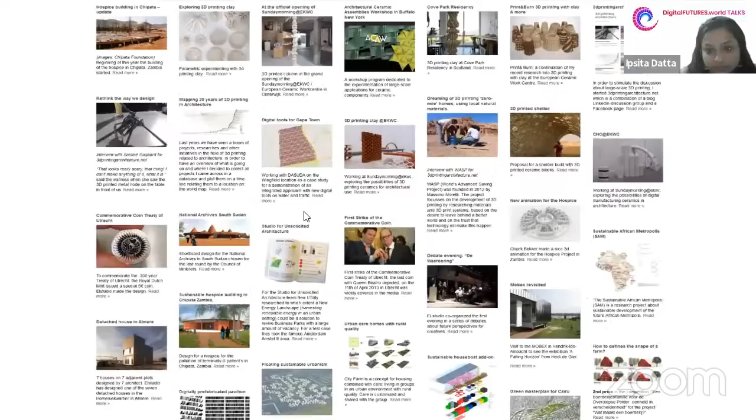So let's start with myself first. You already introduced me. I will talk a little bit about it to give a bit of context to the research I'm going to show, because I had my own office for quite a while, where I did a great variety of works, from small designs to big landscapes. And one of them was 3D printing ceramics, which we'll come back to.

But at the moment, I'm working at a robot lab in Amsterdam. It's a robotic fabrication education facility where we try to combine practice, research, and education, which is super interesting. However, we're not working at the moment with ceramics. We're working mainly with wood and 3D printing with plastics. So the work I'm showing here will be a little bit older, but hopefully we will get back to working in ceramics pretty soon.

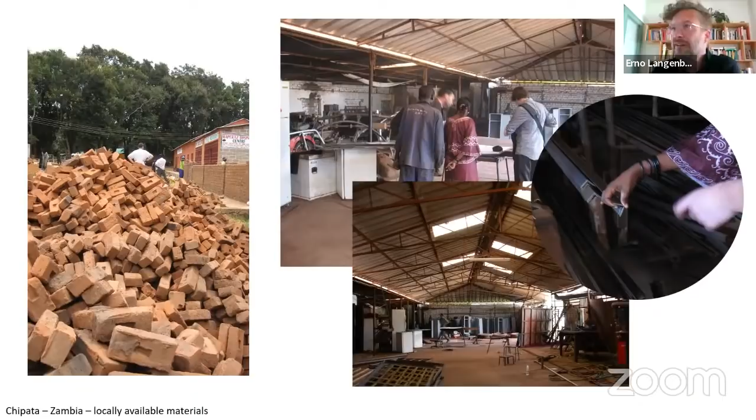It all kind of started when I was with some friends working on a project in Zambia. It was a sustainable hospice building, and the idea was to make it from local source material. We visited the location and figured out that there was, of course, not that much material available. And for the roof, we were depending on a limited amount of steel, which was locally fabricated, which was only a 40 by 40 L profile.

So what was quite interesting, we worked with an engineering company who reverse engineered, with this only available steel material, a kind of complicated roof, which was fairly easy to mount, just from the locally available material. And in this sense, parametric design helped quite a lot. So the software was complicated, but the material was very simple.

The project is still being built. It's a kind of slow process, but being on the site, I thought, yeah, there's so much other material as well which is not used. So that's where my interest started in 3D printing with local material like clay or earth. This combined my interest in digital programming and fabrication and the material of the earth, with the idea to make a very sustainable way of building.

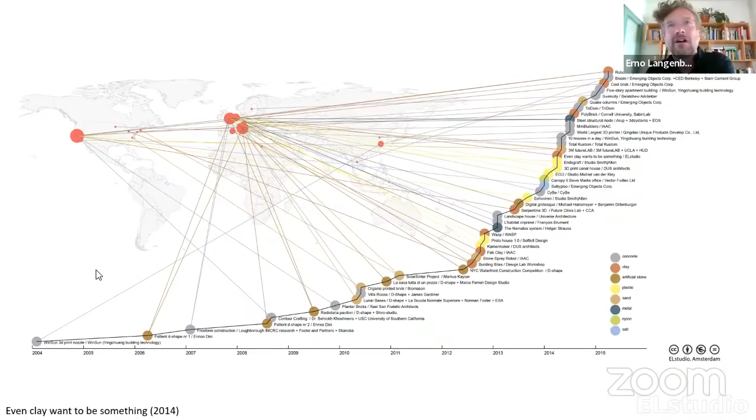So I started my research in 3D printing, first making this little graph, finding out that there was already a lot of things done. But my main interest was to have local material in order to avoid this global movement of materials all over the place, which now is actually more urgent than ever because of the global situation. And of course, with the idea to go to a more circular building practice where knowledge goes through the world, but not the material.

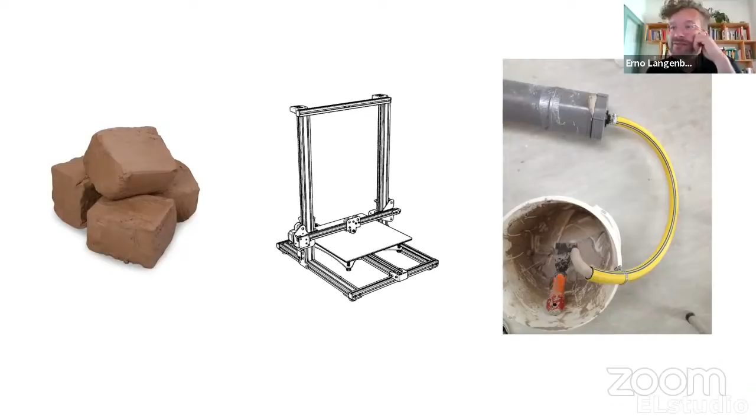So my choice of material was clay. The research started out: what can we do with clay, which is local, available more or less around the world, and also applied in architecture quite often, like roof tiles, bricks, and all these kinds of elements. So what could digital fabrication add to this process, which is basically the extrusion of clay paste, if you put it simply, which led me back to the old way of making pots, which is coiling. It's quite known in pottery, and normally this is done by hand, and the clay is often smoothened by hand in order to make the print a bit stronger.

However, for architectural application this was a bit limited, because you're stuck to a kind of vessel shape. And I wanted to explore the possibilities of opening up this structure in order to let, for example, air in or liquid or light through. So my initial thought was to have two ways: you could either make holes or rotate the print. The research entails, I think, which is important, experiments in these three fields, and ideally they come together in the middle.

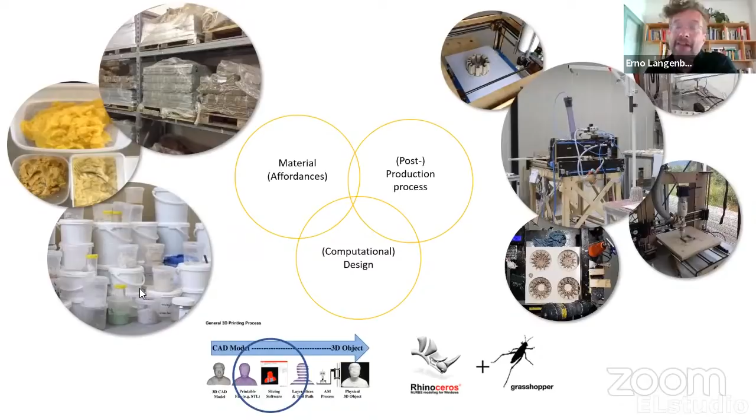So I set out for a few years of experimentation with all different materials. We hacked various different kinds of 3D printers, CNC routers, and the sort, and of course looked into the software, which at that time was not so much available. By now there are some more booklets and tutorials on how to print clay, which makes life much easier. Still, I think it's quite a big step for students to step into this.

So the first experiments were these objects, which was basically turning the print around and defining the printing path yourself. And by overlapping the clay, because it's a smooth material, you can make lattice-like structures. And actually the crossing of paths is quite a good thing to do, because it makes the clay only stronger.

From this, the next project stems, which is already a bit more of an architectural application, where these bricks could be stacked without using glue. In this way, you could envision a small pavilion being made, where the bricks are adjusted to local needs, like ventilation or air or sunlight, if you will, by just changing the script. All of these bricks are identical in terms of code.

Well, this was a kind of visualization, and eventually, if you had the time, this could be a pavilion you could make with this technique. We'll come back to this time issue at the end. So the next attempt I did was to open up the vessels, if you will, in another direction.

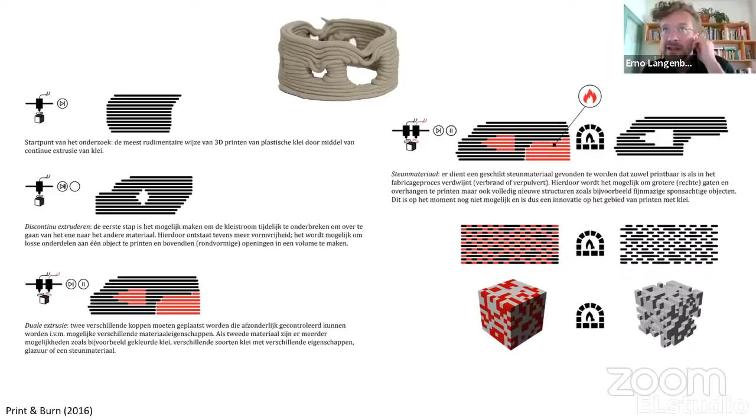And it could be an ideal solution, because clay has to be fired in a kiln, and at that temperature, everything else but the clay will disappear for sure. So if you are able to print with two different materials, the second material will disappear or disintegrate. I was having the luxury to try this out at the European Ceramic Workcentre in the south of Holland, which is a great workplace with different kinds of kilns where you can try this out.

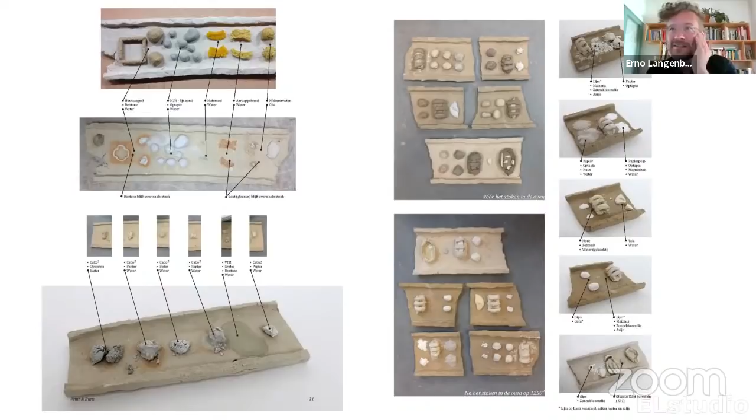So we tried all different inorganic and organic materials. Some are more successful than others. Some organic materials which you think will disappear turn out to be glazings and so on. It's quite fascinating. But it requires a lot of attention and a lot of further research. We managed a few materials which were workable, like the one on the left is a kind of mixture between bentonite and other kinds of ingredients, which turned into powder, which was a kind of successful start of it all.

A next residency I did was in Scotland at Cove Park. It's an amazing place next to the sea, where you have your own studio. I installed my two printers and started experimenting a bit further on different ways of opening up the structures. And one of them was also a bit more the rotated print, where I incorporated the locally found beach glass, which melts at the same temperature as the ceramic, so you could integrate it quite well.

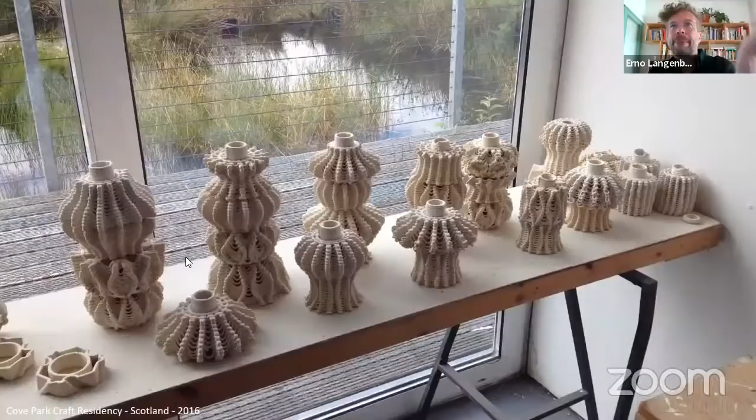The previous was a quite simple trajectory for the printing, but this is a more complicated one, which combines alternating layers in different directions with the idea to open up the structure. And as a result, of course, we cannot ignore gravity, so the clay will drop down because it's very bad at bridging. But luckily, it's going down in a controlled manner. So you could tell in advance how far it would go down. So in that way, you can play with the bad qualities of the clay in such a way that it becomes interesting for you.

I printed a lot of these objects, and eventually, all being the same, they could be stacked into this kind of ornamental column, which has a kind of organic feel to it, although it's a completely scripted object, and it's all just basically ones and zeros. I think it's a quite fascinating idea.

Another experiment was a bit more free and constrained at the same time. It's printing on a mold, which is also a technique used in ceramics. And it gives the freedom of printing in real 3 dimensions, while at the same time being free at the depositing of the clay itself. And you can imagine that you can have very intricate patterns and crazy shapes, but still following the same curve, which I think could be quite useful for architectural applications. These might be too small, but I think if you scale it up, it could be interesting.

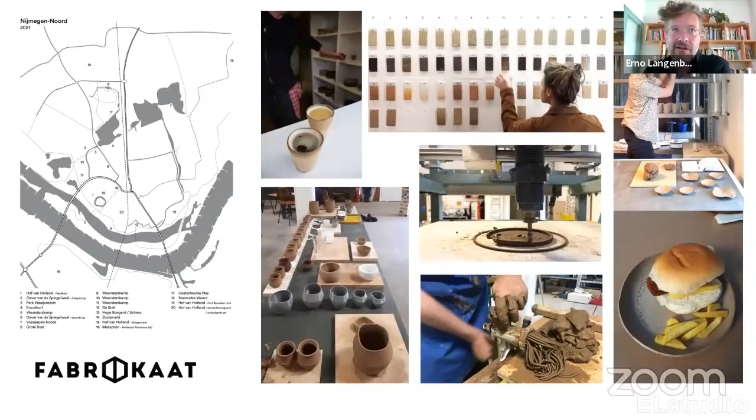The last project I'm showing here is a non-finished project, but it's more recent, and it's a beginning of something more architectural. It's a commission I had for the foundation Fabrikaat. They're in the middle of Holland, based next to a river, and they asked artists and designers to work with the local clay they found next to their location. And a lot of different projects are being done. And they asked me to come up with a little facade cladding for the building they have here on the top. And it was an ornamental facade tiling.

We started out thinking about the maximum size of tiles which we could make, because the idea was to have it all locally produced. So we would bring in small printers, and they had a small kiln, which was basically the bottleneck of the whole process, because the kiln size was limited. So we couldn't make the tiles too big. When you lay them out on this building, which was an old building and not straight at all, you of course have a lot of corrections at the edges.

So that's, I thought, the idea: if you're gonna have a lot of different ones and the printer doesn't mind, you might as well have them all different. So therefore I made a design with all completely different tiles, kind of representing the flow of the river, and this could be interesting to be done.

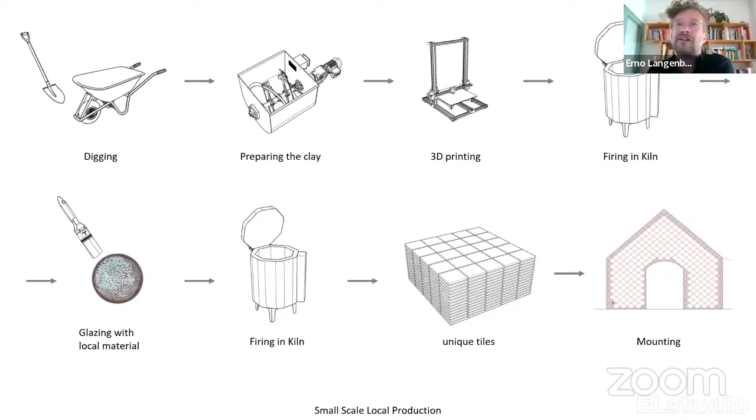So we all were happy, and we started thinking about how to make this. And of course, there's a lot more to it than just printing these tiles. We had to dig, prepare the clay, printing and firing the kiln, glazing and firing again. And then, of course, in the end, mounting the tiles. And adding dates to it, we came to the conclusion that it's quite a lengthy process, especially the printing would

take very long. And eventually there was this idea to make a little print farm, and we could reduce the printing time enough so it would be a feasible project within the time frame we had, the location, all by local means. And so we didn't have to travel around with the clay or the prints. So it was ideal. But it made me think about how to scale this up, because this is in fact only a small facade. It's really not that big of a project.

Oh yeah, well, small note is that the project will be finished, but in a different building. But I will continue.

Because if you think about a house, which requires around 8,000 bricks, could you do this in a sensible manner in the way we made this little local project? And I think it becomes a bit more difficult because of the amount of time and the amount of hours, and still these printers don't run unattended. So most likely, this would be more feasible in a kind of factory-like setting like this big brick factory, where there's already robots available. So it could be interesting.

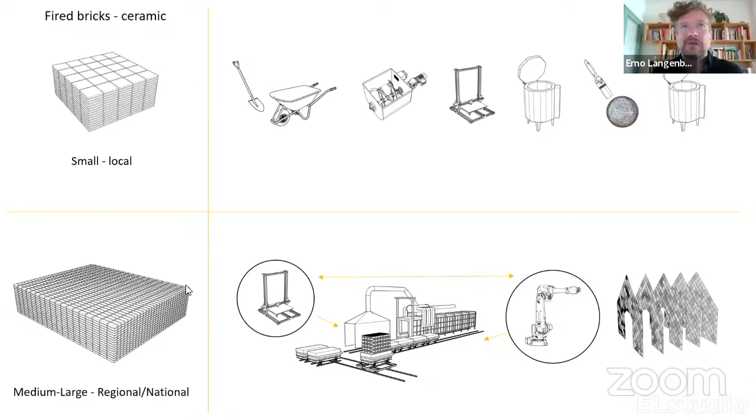So my question was also, where does the added value of 3D printing in ceramics, which is different than the later project, which is 3D printing with unburnt clay, where could this be? Is it in a factory? Is it really local? And how big would it be to make sense at all on an architectural scale? Because in the end, we talk a bit more about a product-like object.

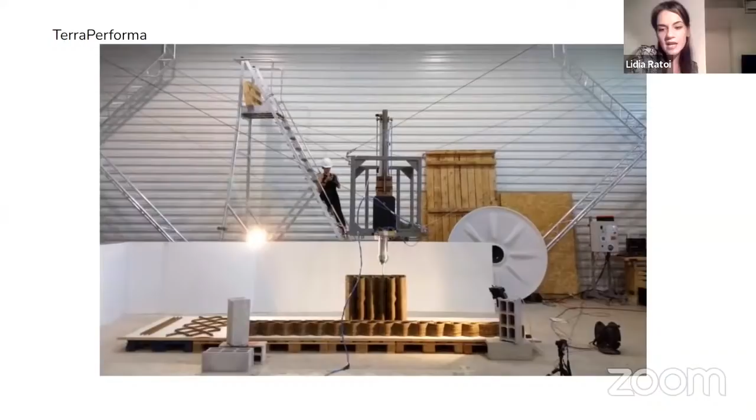adapt to local conditions. And the impact I'm trying to measure is how technology is changing, how are we influencing the communities for which we design, and how is nature growing and thriving instead of adapting to what we're doing to it. So as an introduction, I'd like to very briefly present my first project dealing with the issue of robotic fabrication, TerraPerforma, done with IAAC, Barcelona.

My thesis advisors were Alex and Edouard Cabay. And I really want to thank them for giving me a very healthy introduction to the world of robotic fabrication. And I use the word healthy because a lot of times we teach students how to use tools, but not how to question the ethics, the implications, or the potential of these tools.

So I think I was super lucky, because the brief for this project consisted in constructing a 3D printed clay house with a self-regulating environment. So we were taught how to question and how to quantify our designs. So as opposed to what I would have imagined about robotics, because that was my very first experience with robot fabrication, there was a lot of research on historical background, taking inspiration from vernacular architecture, such as the wind catchers of Iran and the clay towers of Yemen, which allow for self-cooling on the inside of the building.

And each brick had its own unique logic regarding solar radiation and wind patterns, but the overall facade worked cohesively. And all aspects of the design were calibrated for the site in Valldaura. And I think around this time, I really started to question the projects that I was seeing done worldwide, and most importantly, these kind of trends in computational design.

And one trend that I really took a stand against was that of mass customization, which implies that the same machine, the same digital file can create an entire catalog of unique elements, though they're all distinguishable from the same mother entity. And I took the liberty to go against this trend because I consider it doesn't really respect the intelligence of a robotic arm.

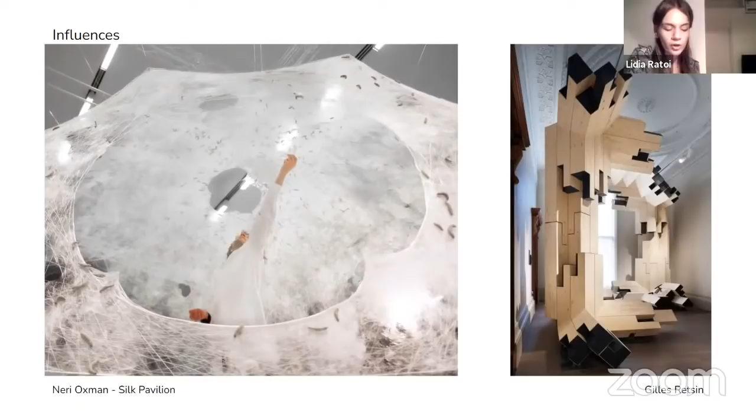So other influences that I started to look into were, of course, from designers such as Neri Oxman, who's doing cutting edge research in biomaterials and robotic fabrication and soft robotics, and Gilles Retsin, the pioneer of discrete architecture. And I remember at the time I was actually preparing to interview him for Cloth magazine. And so I got to spend a lot of time researching his work, reading about it. And I got really interested in the world of object-oriented programming and object-oriented ontology.

And I think possibly the most inspiring element was Mark Foster Gage's arrow diagram. So it protests the treatment of architecture simply as a diagrammatic means that needs to be simplified until the point at which it can be built the easiest. And this has been a big influence on my work because when working with biomaterials, the behavior of the material can be revealed through an extensive trial and error procedure paired with machining protocol. But you can only really discover answers, because the methodology is quite new, so you cannot be given answers.

And this brings us to restorative coral habitats. This is the project that I was really lucky to be a part of in Hong Kong University, my first project when I joined Hong Kong. They actually started the project a little bit before my arrival, but I arrived exactly at the fun part, the design and the testing phase. And it's a project in which all 50 units are identical for extremely specific requirements.

So the project was a collaboration between the architecture department in Hong Kong University and the marine biology department in Hong Kong University. So it brought together very different sets of expertise. And it was tailored for the unique conditions of Hong Kong. So Hong Kong is a city with an extraordinary richness of nature, but it's also one of the most dense built environments in the world and has really high pollution levels.

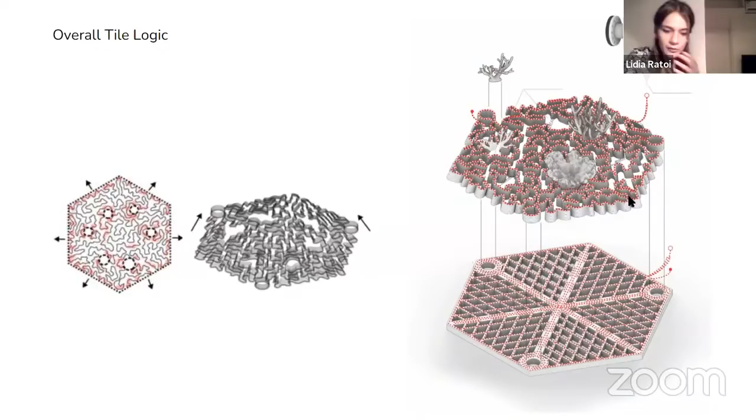So there was a lot of calibration we had to do, because there were the requests from the marine biology side, then there was material behavior, and there was machine behavior. So we started first by testing the bottom layers. The first test was a square grid, but the problem was that basically the nozzle dragged too much material within the intersections.

Then we tried with a triangular grid, but the printing lines were too long. It was cracking when it was drying. Then we tried a trihexagonal grid, but it was also cracking when it was drying. So then we experimented with a space filling curve, but the tiles became too dense and there was too much material use. Printing time was too long.

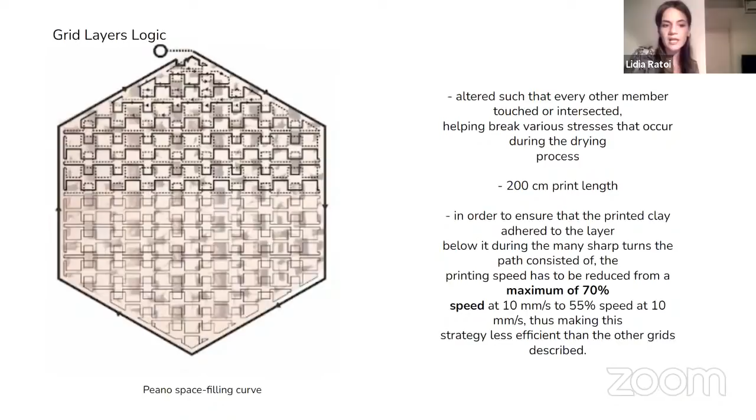I forgot to mention we were quite a small team printing, and we also couldn't postpone the very precise deadline that we had because, as I said, corals only grow in the warm season. So we only had a margin of error of a few weeks within the year in which we could deploy the tiles. So finally, we created the diagrids and we divided the hexagon into separate parts.

And that gave us, first of all, shorter printing lines. And the tiles were symmetrical around the center. So that means that they were drying symmetrically and we didn't have cracking anymore.

And the other problem that we had to account for was, as I said, the competing species. Algae is the biggest problem. They grow the fastest as opposed to corals, which are one of the species that grow the slowest. So we had to design these coral mimicry layers really like a shield to protect the coral fragments.

So we started with a space filling curve, but it was irregular. So that created problems when it was drying, it was cracking. Sharp edges also are not good because they would interfere with coral growth patterns. So you really had to accommodate for how the corals naturally grow. So then we tried a shortest path logic, but again, there were long lines uninterrupted. So they were cracking when they were drying.

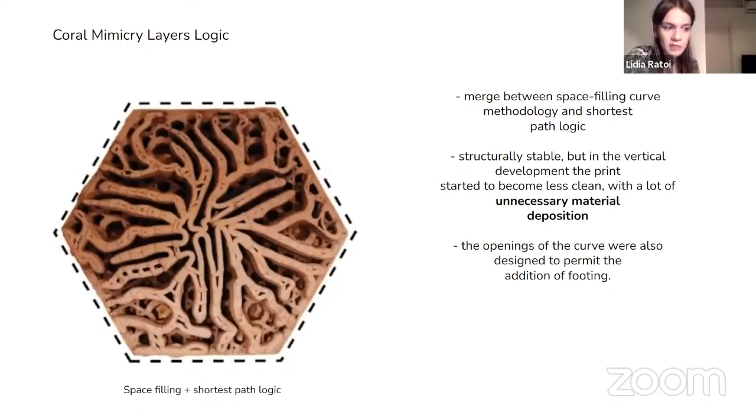Then we decided on a mix between a space filling curve logic and a shortest path. And it was drying okay, but it was using too much material. It was taking too long to print. It was taking too long to dry.

So finally, we experimented with the Gosper fractal curve, and that was actually growing from the layers underneath because we were printing first the grid layers, and then on top of it, we were printing the coral mimicry layers. So they had to dry cohesively together. And each fractal subdivision was coinciding with the sides or the diagonal of the layer underneath. And then the subdivision was relaxed because we couldn't have sharp edges.

And being that we had a curve that started to work with the layers underneath, the last step we did was that we subdivided the curve even more to have shorter printing lines to dry better. And we added the pockets for corals because all coral fragments had about 6 to 8 cm that they needed as little pockets to be deposited in.

And this was a challenge because once again, when we created bigger openings, we would have incohesive drying. So we made this folding pattern. So whenever there's a pocket, the line right next to it gets more dense to counterbalance the scarcity.

So we also included these special handles in the patterns, which would signal the location of the legs because we couldn't just put the tiles on the bottom of the water. We had to print legs for them as well and elevate them slightly because there's sediment on the bottom of the water and the ground is uneven. And all ridges and trenches were at least 2.5 cm wide so that the corals can grow within them.

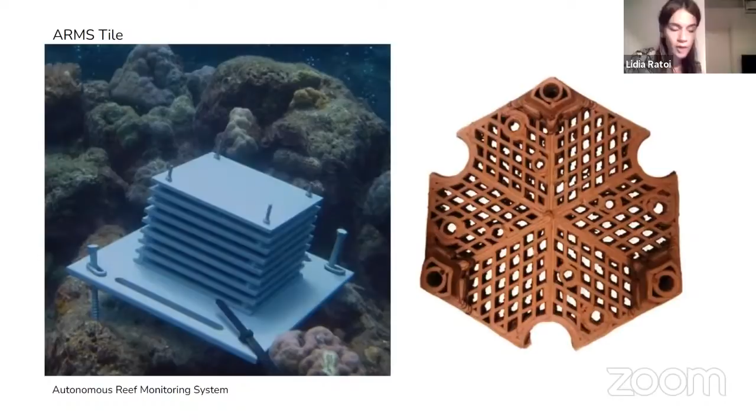And between every 3 tiles, there's this special tile that hosts the autonomous reef monitoring system. It's a standardized global measuring tool for underwater life behavior. And this brings me to discuss the overall system and kind of concludes.

As I mentioned, we had to print legs for the tiles as well. The way that we did that is that we would print the grid layers, then we would print the coral layers. We would wait for them to dry for about 4 days, and then we would flip them and print the legs. And then we created assemblies with 3 tiles holding the coral fragments and 1 tile holding the ARMS. And there's no formal variation, there's no mass customization because we need to be able to trace the results.

If results between tiles would be different, we wouldn't know if it's because of the geometry or because of the environment. So in all 3 sites, all tile units are completely identical. As I mentioned, we had a team of diving volunteers to deploy the tiles. And from the observations so far, both flora and fauna are accepting and are benefiting from the tiles. And there's also species we didn't expect interacting with them. The coral fragments are growing, as you can see.

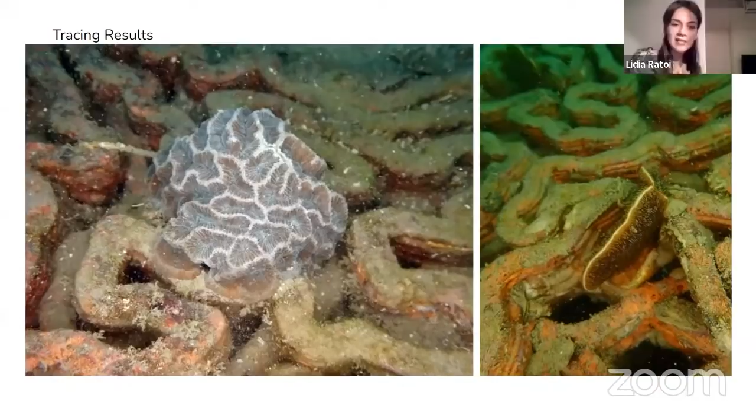And yeah, this is about it, about this project. And I'd like to very briefly introduce another one. If so far I discussed pure research, I really want to talk about how teaching has influenced my research. So I started teaching the year 2 program in Hong Kong University about 3 years ago. And the program focused on housing with studies on vernacular Chinese architecture in the second semester. And I was teaching a studio on traditional Chinese wooden houses, and I became really, really interested in the topic.

And then this led me to collaborate with John Lin, who's the previous coordinator of the program, on the Traditional House of the Future project. So I'll present it briefly because it's at the beginning stage, and we haven't really been able to print so far because of the quite bad situation with COVID in Hong Kong. So I haven't really been able to be in the lab. The project is located in Guizhou, mainland China, in the village of Nanlong. So that's south central China.

And the aim of the project is to create a new urban attraction that could generate touristic potential and benefit the village financially. And we're going to dismantle the existing wooden structure, restore it and reassemble it, and intervene with a new robotically printed wall. So that project actually deals with a very, very classical architecture issue, the way that we imagine it, with that of the skeleton and the skin. And I started questioning this issue as a design generator in the spring of 2021, with students intervening with a new wall language in traditional Northern Chinese houses. And the methodology followed through the next year.

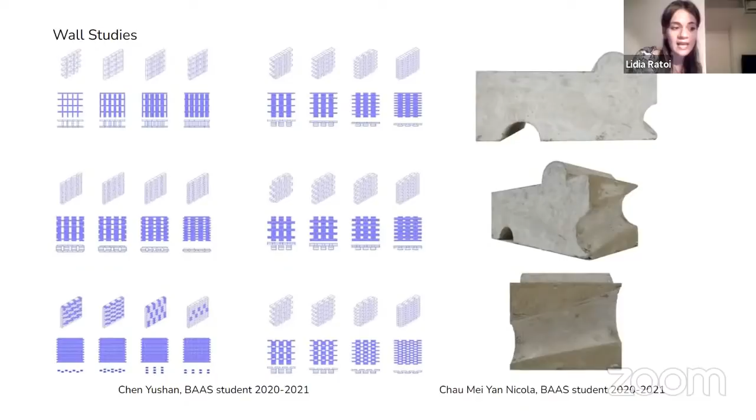I had the opportunity to become the coordinator of year 2, and the studio was a great opportunity to pair teaching and research. And we did a workshop where we built a version of a wooden brick house prototype at 1:3 scale. And we imagined a new type of bricks that were porous and they were reacting with light. And it also allowed students to use reference from my previous work with TerraPerforma. So they were creating novel bricks and stacking languages. For example, in the project on the right, the student investigated how inclined channels can allow winter sun to penetrate the inside of the house, but deflect summer sun rays. And that's a technique used in traditional Northern Indian temples.

The geometry of the wall extends beyond the house. It creates enclosed courtyards, which is a very common feature in traditional Chinese houses. And it has a semi-private entry. And the two structures communicate, yet they're very clearly defined. These are some studies that we're doing about the tectonic relationship on the insides. And I'd like to highlight here this issue of non-exploitative architecture. And this includes exploitation of people and excluding them from the process. And this is something that we really don't want.

So therefore, our construction process relies almost entirely on local builders and local villagers, and it creates a participatory process of construction with the village. So local woodworkers will help us in developing new ways of erecting the wooden structures, because it's not possible to build the wooden frames separately as usual and then put them up, because they will be mounted after we 3D print the walls. And villagers will also participate with us in sourcing and mixing of clay for 3D printing. And a lot of families have already left the village.

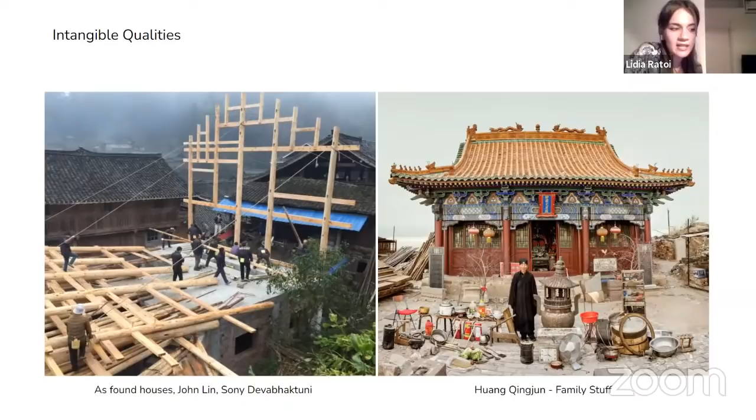It's kind of an abandoned village. So the traces of their own domesticity have remained behind, and they will be repurposed for the traditional houses of the future. And on this note, I just want to quickly introduce my latest research project, Impossible Bricks. It aims to investigate how food waste can be paired with robotic fabrication, because food waste is the largest source of waste in Hong Kong.

And I'm currently working together with two colleagues, Hao Tian Zhang and Tianning Li, on a prototype in Cheung Chau Island in Hong Kong, and we'll use oyster shells structurally, and that's inspired by actually 600 years of tradition of using oyster walls in Cantonese architecture. And we already did some tests this winter combining bioplastics, digital fabrication and scanning techniques.

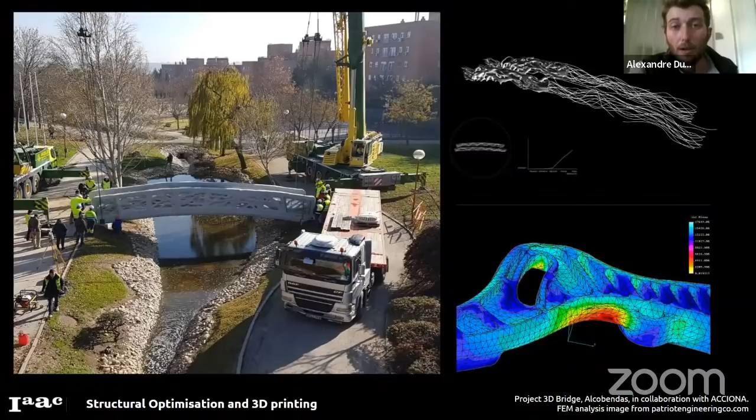What is all this technology doing? We have the chance to be in a boom where digital technology is entering construction. For example, this project where we were capable of 3D printing a bridge, one of the first ones, in Madrid, that was in this case made of concrete together with Acciona, D-Shape, and UPC, where we had certainly a huge design freedom. We have possibilities of using robots to make new processes, new materials, but also big liberty in terms of

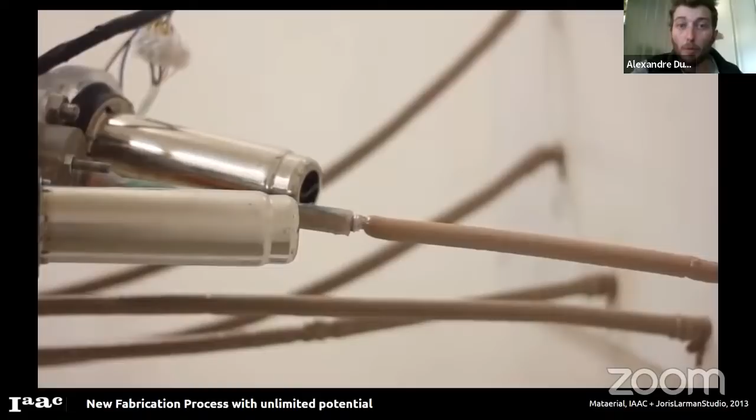design. This wonderful project, now close to 10 years old, was showing how we could maybe print totally in mid-air and make these crazy geometries, if we push the limit of what we can do with materials, how we can control the robot, and how we can integrate all this technology. This said, we had a question for the technology. When you think about it, we have loved this quote from Cedric Price: technology is the answer, but what was the question? And it happens that we have plenty of questions to resolve and to tackle in our society, and especially in architecture, that this video here will introduce, if it works. See.

I don't know if I shut the sound now. I have it out. Do you hear the sound? Yes, but that's okay.

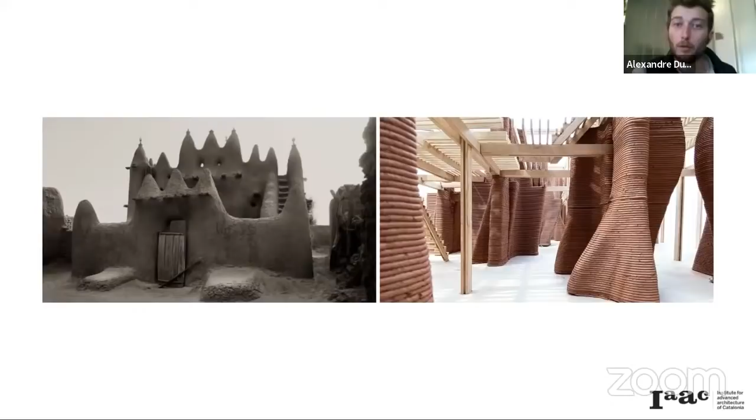a type of architecture. And here with Edouard, we like to show this relation between the past, the history, and how the new tools that we have available as designers could help us to explore this future. When we look, for example, at one of the main topics in Earth architecture, we print mainly against gravity. We have to deal with these problems.

In 3D printing, we always have this problem of overhang, for example. But how can we explore the way to support these structures? And Erno was showing us a very nice research where you could fire these supports. We're trying to see if we could also be inspired by the way arches were built, how we could integrate wood in the way we construct new geometries, something that we could place just temporarily and find ways to then remove it and release geometries that were specifically designed to collaborate with the wood.

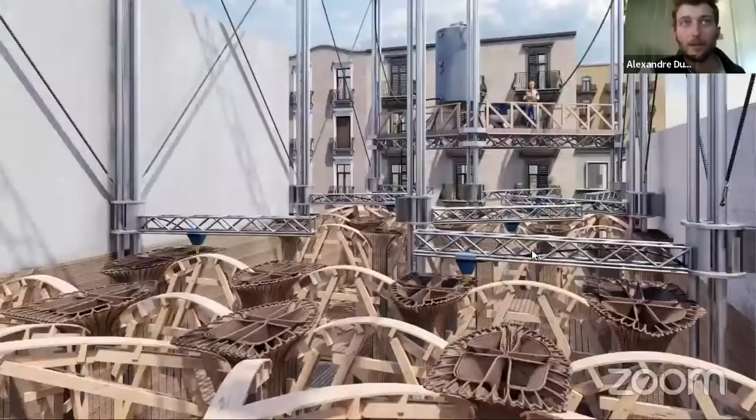So here, many inspirations, as you can see, from the way it was structured and how we could integrate with the specificity of the clay. This is something we feel will be crucial when we look at a different type of architecture that we'll be able to build in more dense cities, and how we could push the boundaries of Earth 3D printing, how we could actually design such beautiful space.

Similarly, if we try to not have any support, but work only with the arch itself, and try to understand how we could build unsupported arches over time, we have many learnings we can get from history, exploring how we could reproduce these geometries, but also understand them using computational design to maybe generate them, but also analyze them, trying to use, in this case, our own geometrical tools to understand them, combined with some structural analysis such as Karamba.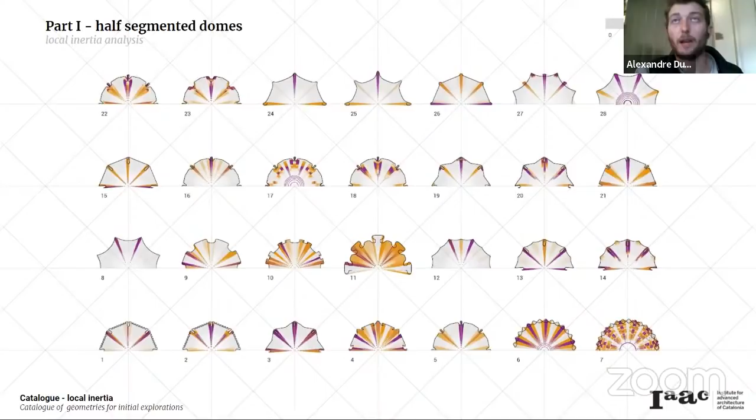We've been exploring a type of methodology that you will see across most of the projects. That is basically a scientific methodology of having a set of catalogs, a set of objects, both in the digital realm and in the physical realm, to let the material express and tell us what geometries are really possible and what could be done in these systems. So you see how they collapse and we learn from it, and then how finally we find out the right geometries, the right balance of gravity and shapes to define these new spaces.

You know, how we can finally have these nerves in the vaults to create such beautiful space as in the Gothic church, for example, in the past. Now, how we can reinterpret these geometries.

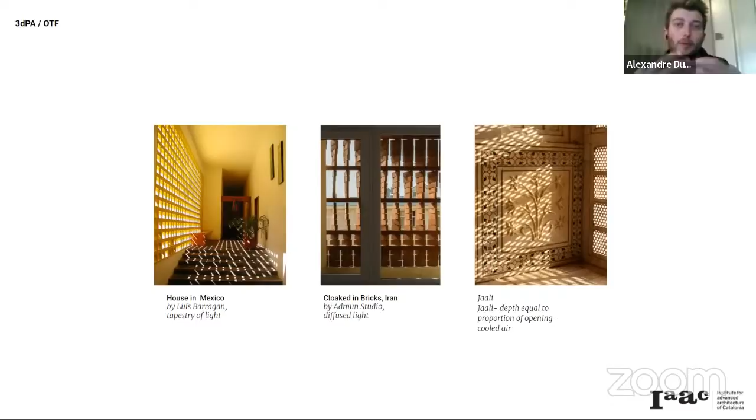Similarly, we've been exploring a lot the question of light. Suddenly, with 3D printing, we have the opportunity to make the Earth building perforated or a bit more evanescent, letting light go through the building, but also allowing a certain level of transparency. Many projects have inspired us, but we also discovered we have many tools available, or let's say scales of operation in which we can act, exploring different ways of building and designing these geometries.

Again, a set of catalogs to understand what are the limits of Earth, what are the limits of these geometries that we could push, using, as you see, sometimes some simple analysis.

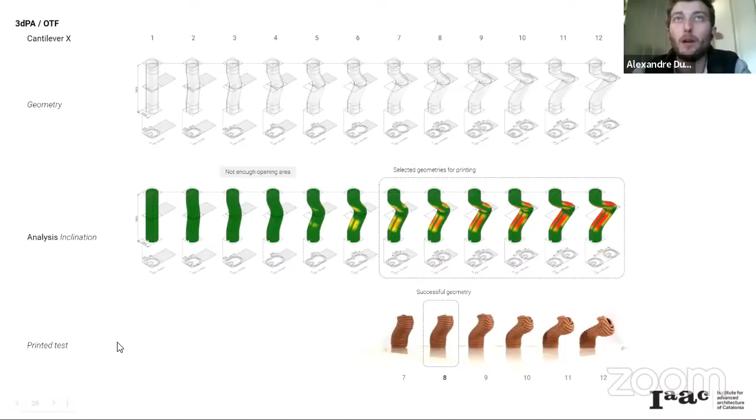For example, in this case, we consider really the inclination, or let's say the cantilever that we can achieve with the building, but also inertia of a small object like this one. And then when you multiply it at a very big scale and understand how we can play with it, you can construct a totally different

systems. What is important here is that you evidently consider the structure, but you also consider the view as a vector, as how we go through the building and how the light can drive these openings, and how we could make that in such a point of view. There's not so much transparency, but from another angle, suddenly a view reveals, letting or choosing, let's say by design, how much light and how much view we could have behind our walls.

This is the kind of thing that then we explore at a larger scale, at the scale of architecture, how we can distribute spaces according to this transparency, how we could be also inspired by the way communities have been building their village according to different levels of privacy. And for example, this student has explored a type of architecture where you would have nucleus a bit more intimate and different public spaces that are a bit more transparent. So how we can really move or translate this learning from the very small scale to the large scale.

Similarly, we've been exploring many different performances. Another one that is very interesting is the question of the wind and the air flowing into the systems. I believe most have tried CFD analysis and different types of tools for these elements, but it's very difficult to physically simulate it in a proper way. And we start to have our own tools that allow us to make quick iterations.

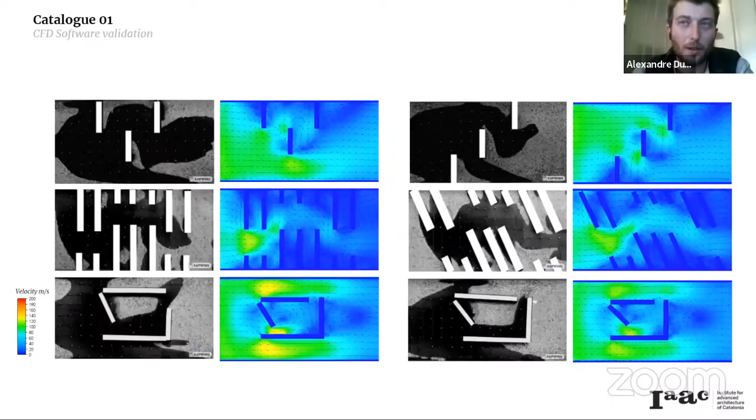Here you can see the technique of the sand spread with pressured air. We also have some other experiments with smoke. Very interesting to learn and to understand how we could play with architectures and the detail of our structures to shape

ventilation in the building. Similarly, we started to look at how we can play with the rain or with the water and how this can move on the surface of our building, either to eject it or remove it far from the building, something that is very important in earth architectures, or try to collect it in certain spaces when we need it more, and therefore concentrate certain areas of our wall that need more reinforcement to the water.

The question of thermal transmittance as well, so how we can design and detail all the parts of the building to handle different, let's say, questions of insulation. So even if we designed, as you've seen in the first video, our walls to be excellently performative in being insulated, something that was not so easy in earth architecture, now we're also looking at how we integrate with the frame, door, windows, what are the different details, and how we can use, again, the performance as a driver for our design.

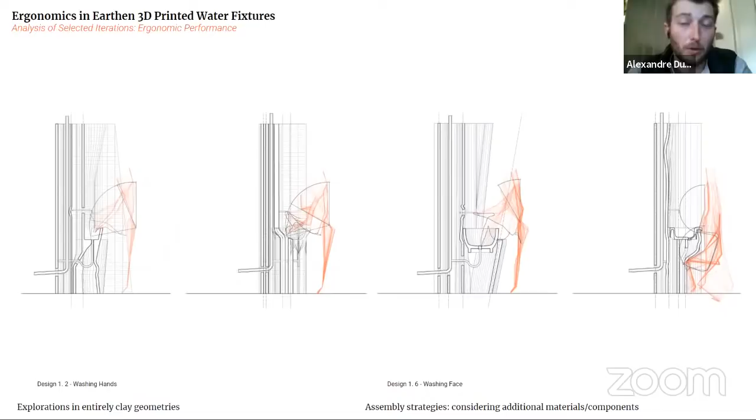We are starting to explore other aspects as well, for example, the ergonomy, how the human body is affecting the way we design a space. For example, here a study on integrating a sink in a wall. So how we design the sink, how we make it repairable or integrated in the system, and working really with the body, so that we can both test simulations, but also scan people with simple technology like Kinect or different elements.

All of these learnings and explorations, we are bringing back into our prototype we built recently in Valldaura, that is a forest campus that we have available 20 minutes from the Barcelona city center, where the students of this year, 3DPA, have built this very nice prototype that integrated some of the learning in the windows, in the fibers, in different details that could be key to realizing this architecture.

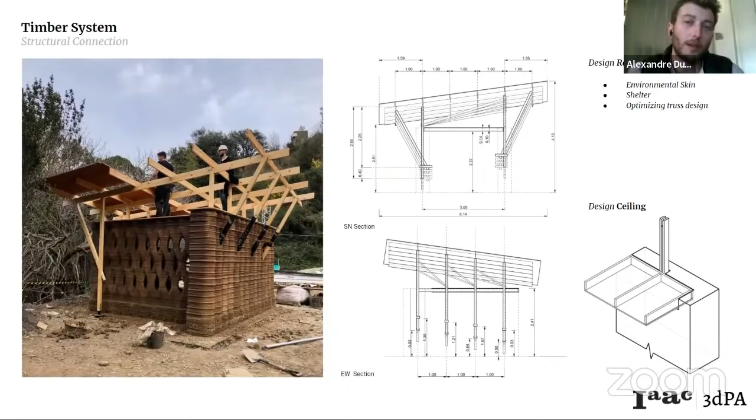For example, here, how we detail the wood structures to be embedded in the earth, and how we can have this dialogue between the earth as a massive wall and this lightweight structure that covers from the rain and the sun, but also needs to be anchored to the ground and not fly away. Most of the earth buildings that you will see tend to have the wood going down to the ground and not necessarily embedded with the earth. So how we make these different materialities stick is a very interesting research.

The final prototype has integrated this puzzle of details in a demonstrator that shows that it's possible to handle all this complexity in one project, and hopefully something we will be able to scale up quite easily thanks to this algorithm. A small video shows this latest prototype, yet to be published properly with the document.

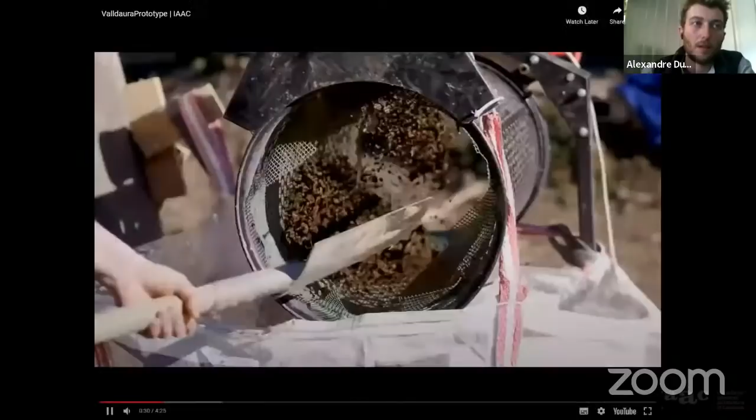We have to mention that this is one of the first projects that really use a local soil that we have available in Barcelona, working all the process of the earth, sifting it, preparing it, mixing it with natural fibers, and trying to build this prototype that is fully respectful of the site.

The foundation itself is made of gabions, recycling stones. The roof is made of wood that could be extracted from the same forest. Everything could be built with material within not even a kilometer from the site if we wanted. This has been built in a month and a half with the help of the 18 students of this year's 3DPA program, and demonstrated that it was possible to have a new type of architecture.

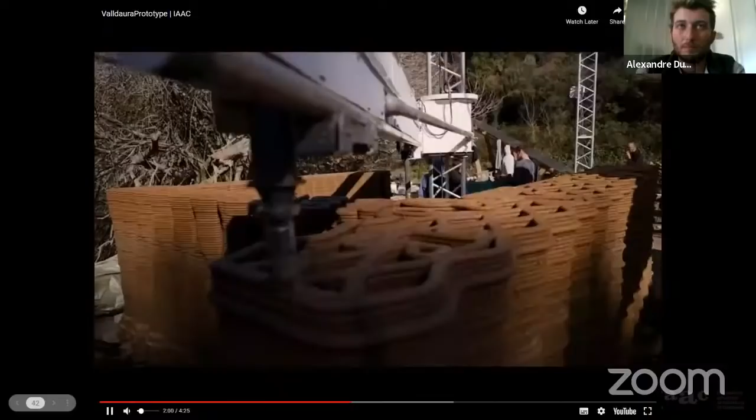As you can see in this image, the intricacy of all the detail integrated in the wall, how all of these elements, from the ventilation, the structure, the water details, how all these important details in architecture are negotiated into one piece is very key. And there's also this beautiful thing of 3D printing, that we have full control of this architecture.

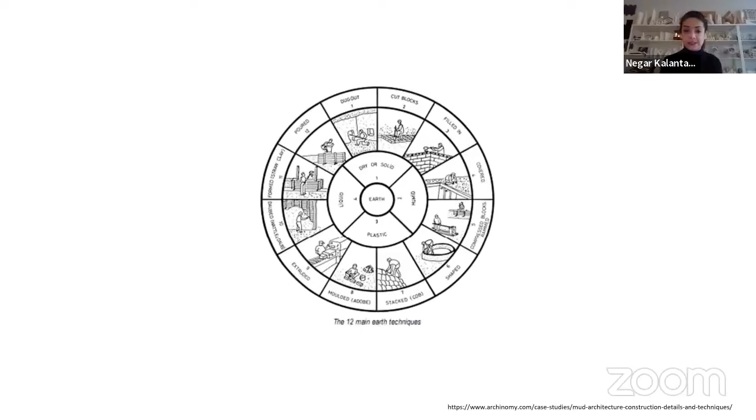And our topic of presentation today is robotic clay printing, where the past meets the future. When we think about clay 3D printing, we all think about the advancement of the technology, what is happening today. But earth architecture really has a long history in the background. And we had a lot of techniques developed in history for this specific material, from pouring, casting, cutting, and extrusion. And when we see historical architecture from Middle Eastern countries and around the world, Africa, we've seen amazing masterpieces with these materials.

The inside seems amazing, larger scale structures out of these materials. But when you look at it from the outside, it's not just one standalone building, it's whole cities out of this material. And we have civilization, 1,000 years of skills and knowledge related to earth architecture.

That when today we talk about clay as a material for building construction, always think about how we can use all of those techniques and all of this amazing historical, geometrical knowledge that human beings developed, and how we can use them in our current practice.

But something that I think is happening is the disconnected research and knowledge. A lot of this research about the historical geometries and structure isn't connected to the other research domains. And it's maybe not the main research that we are doing on the technology side, so how can we connect these domains of research together?

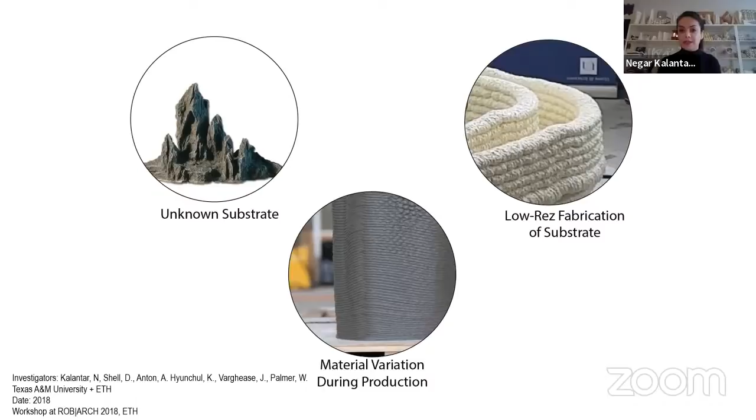In hardware and software, today Mehdi and I are going to talk about a few projects and research that we have done in this domain. For hardware and software, I want to share the collaborative research with ETH and Texas A&M, where we proposed this workshop about how we can deal with a material like clay, which is a live material. During the process of fabrication it changes its own properties, and it's not the same as FDM or printing with plastic. So each layer has its own properties. It can change during the process, the shrinkage, a lot of things happen with natural materials, and how we can control that.

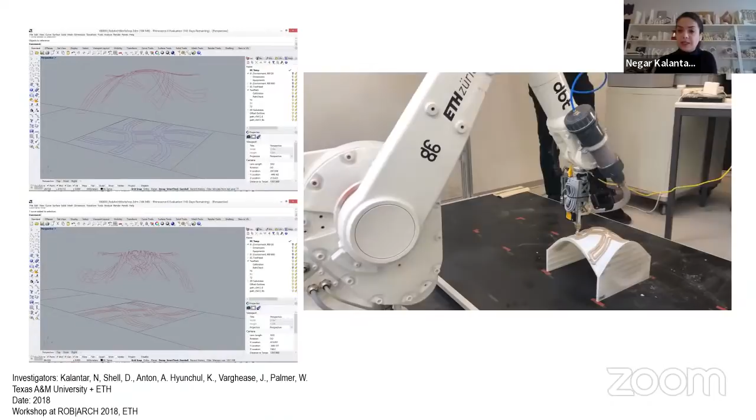What we were proposing was real-time sensing, and it was not about X and Y, it was more about the Z axis. So we embedded the laser on top of the extruder, monitoring the previous layers and the substrate under the print. We were dealing with the 2D projection of the geometry that you want to print, and the sensing happens during printing, knowing what the substrate geometry is under the print. With that, we could print on almost any surface, and if there is any error on the previous layers, we can compensate on the upper layer.

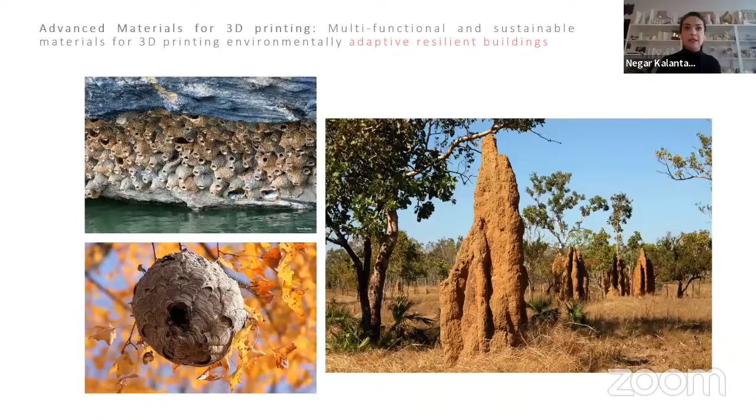The next project was about material exploration; we had a grant from the president of Texas A&M on exploring new materials for 3D printing. Today, when we talk about materials in the position of architects and designers, we can deal with three domains: how we can design new materials, and how with geometry and computational design we can change the property of the material. But in the middle is the real potential: through fabrication, how we can tune the material behavior. Our grant was about how we can be inspired by natural materials, how animals, by adding a little biochemical to clay and existing soil materials, make structures. It was a collaboration between material engineering, structural engineering, and us as designers.

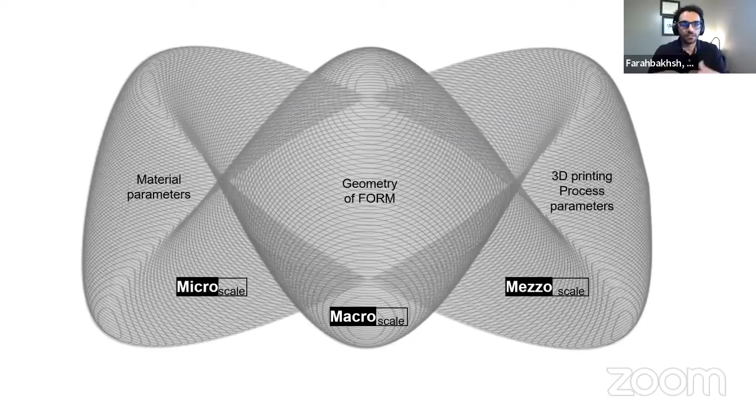And Mehdi? Yeah, so when we talk about earth architecture at the building scale, the larger scale, we're dealing with three different scales. We categorize them as micro, meso, and macro scale. Micro is more related to the material properties and the ingredients and components of the material. But as architects in the design part, we deal with the meso scale, which is more about the 3D printing process parameters, and the macro scale, which is more related to the geometry of the form. But it is not just a linear relation between those scales. It's a much more complex relation, which I will talk about in a little bit.

In the first part, we were trying to replace or substitute concrete with some clay-based material, if I want to call it clay-based material, and it was a collaboration with architects, construction scientists, chemists, civil engineers, and soil and crops science. And we had a collaboration with the Autodesk Technology Center in San Francisco.

So we were dealing with two different aspects: climate change, that the building industry is responsible for 38% of pollution, and concrete in particular is responsible for almost 8% of that. And also considering the technology and material breakthroughs, for example, there's a prediction that future buildings will be made out of mud.

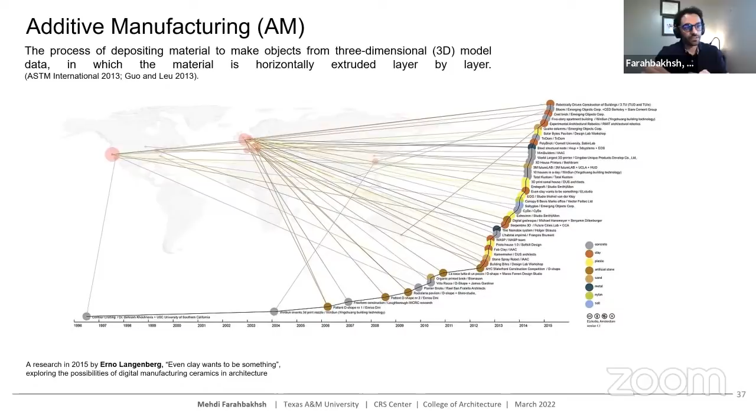So this is the definition of additive manufacturing in ASTM International. And this chart is research by Erno, who presented his fascinating work earlier today. With this chart, I want to emphasize how important it is that we know what other people have done in this field. We are standing on the shoulders of giants before us during the 1,000 years of history. Most of those people are not publishing, or maybe not publishing in English, and we're trying to see what we can do and create an open source feature for that. Negar will talk in more detail about it in a bit.

So we have published one paper on how you can literally use your backyard soil to make a construction material and 3D print with it. In this aspect, we had some struggling challenges with the tool that we wanted. It was a few years ago, so there was not any 3D extruder available on the market that we could use. So we came up with a design of an extruder that works with the specific material we wanted to work with.

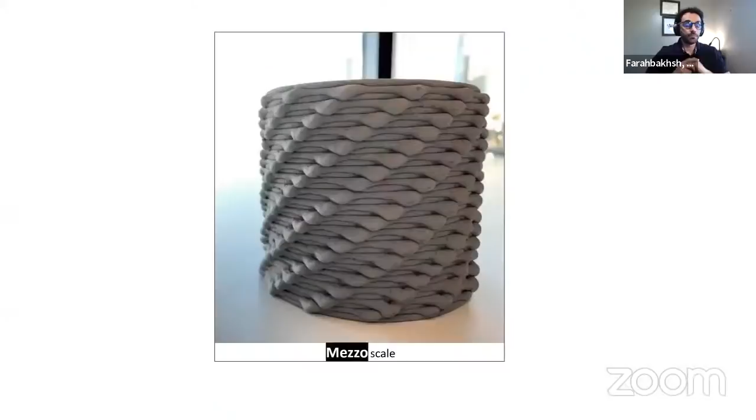And these are just the iterations of the extruder. We were using something very simple, just a pneumatic system, and then a combination of mechanical and pneumatic systems. And we have published a paper on the impact of robotic 3D printing process parameters, which is the mezzo scale that I was talking about. The importance of this scale is the binding between layers, which is important when you're talking about lateral forces like earthquakes. The binding between layers is very challenging, with cold joints and other issues.

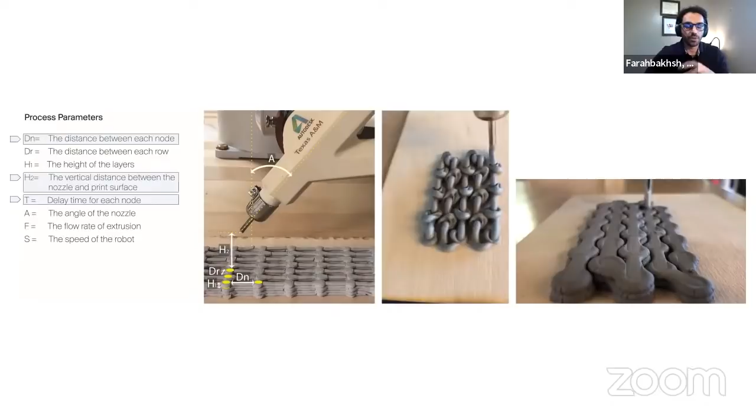We have a workflow here that focuses on design, fabrication, and digital reconstruction of those fabrications to analyze the data. So we hypothesize something, which I will talk about in a bit, and then we wanted to make sure what we are claiming is true based on the data. So we defined a few parameters that everybody is dealing with, and we systematically manipulated 3 of those parameters. You see the effect of changing one parameter on the print result. But it is not just aesthetic; it is more than that.

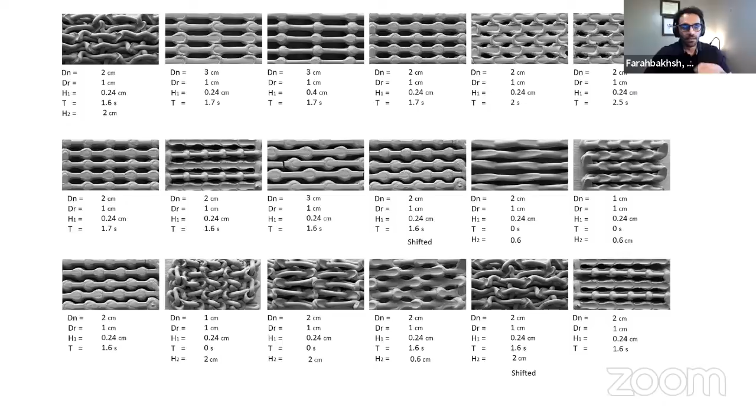For example, in this demonstration, you can see changing just one parameter, H2, the distance between the nozzle and the previous layer. On the right side, you see the conventional layering, and on the left side, you see it is replicating the compaction or densification between layers. We were thinking maybe it is improving the binding between layers, and we wanted to prove that. So we came up with different patterns by changing those parameters and applied them at different scales. The mezzo results were applied at the macro scale.

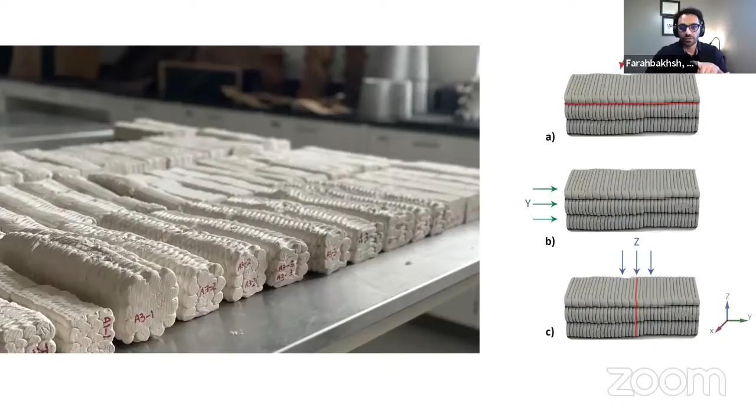And we created a library with all those features and parameters that can be used by a designer or an AI algorithm in the future. If you want to design a geometry, you can predict the behavior of the form. So we had the results in the digital world, and we wanted to make sure those results are valid in the physical world, so we ran some physical tests as well. As you can see on the right, it depends on the orientation of the force that you apply to the sample. We chose the C sample, the bottom one.

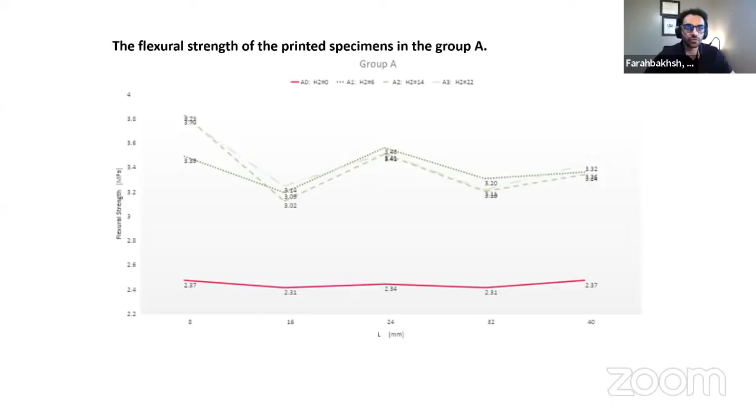And here you can see the green chart shows you the improvement of the bond strengths between layers. And in the 95 samples that we tested, we could improve 41% of the bond strengths between layers.

So we have two approaches here. I was talking so far about material, but in terms of design and fabrication, we have two approaches: print in print and print on print. It is kind of a discrete approach to design that you can build structures larger than the scale of the robot, because almost all the printers, all the robots that we are using, they're dealing with the scale of the object that they can print. And what if we want to build something that is larger than the scale of the robot?

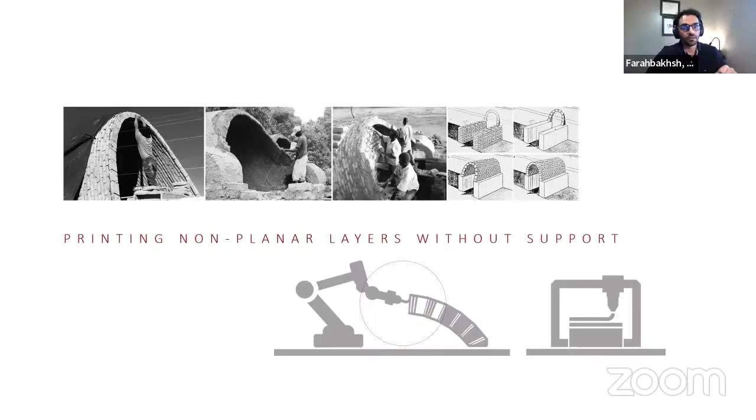So we were also following the precedent approaches of traditional construction, and we applied that into new technologies like this. And yeah, thank you.

We want to talk about the design aspect for a technology like 3D printing, what's going to be the design approach on that one. And one of the design proposals that we have is nesting fabrication. I'm going to talk about the three aspects of that, but it's more about how we can use smaller tools for larger construction, and how we can use the whole area under the tools for fabrication.

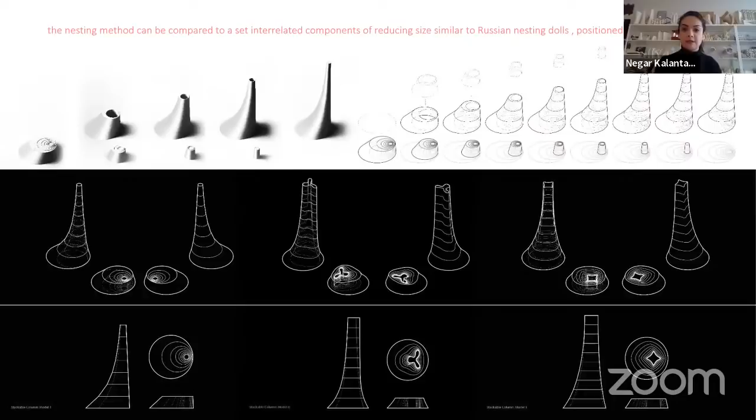And these are the three scales of nesting: 2D nesting, 2.5D nesting, and 3D nesting. And all of those have the similarity of how we can have less material wastage and more compact printing. And it's more about how we can break the overall geometry into components that could be compact inside each other, and we use the whole area that the tools can offer us. So the slicing or designing at the component scale comes from the limits of the tools. And this is a 3D nesting. I'll go through each of them.

So 2D nesting is more popular, and it's more about how, in manufacturing, we nest the components inside each other. But we are not talking about that one. We're talking about how each module is suggesting what's going to be the surface of the next module. So all the modules can come out of one stack of materials.

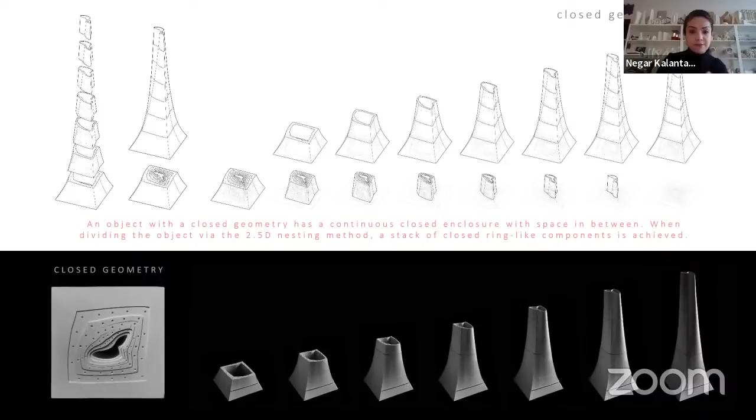In 2.5D nesting, it's more about how we can have a closed or open geometry, but for the components of each module, the inner surface of the first module is defining the outer layer of the second module. And we can have closed geometry or open geometries. In a closed geometry, as I explained, all the modules come from one stack of materials. So it can be produced all as one piece, and they come out of each other, and they can be stacked to the final form that we designed.

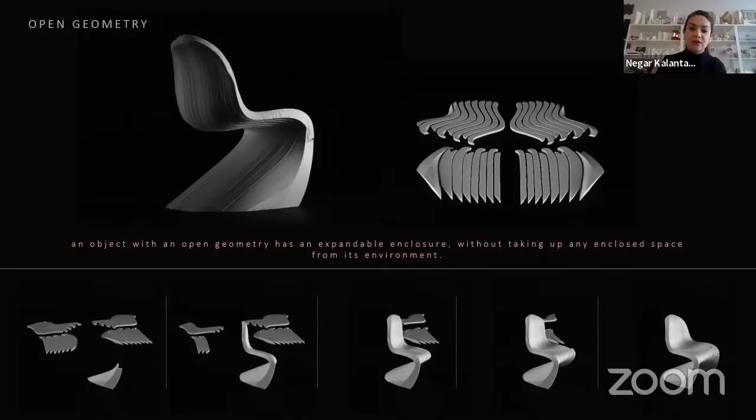The open geometry is more open to design as well, so we can have more complex geometries. And again, it could be produced with the stack of materials that come out of each other. Any closed geometry, or any geometry, could be cut, and it becomes more free in design and production. And the components could be variable based on the fabrication process. So for example, the dome structure could have very different types of stacks of materials.

In a 3D nesting, we are dealing with more freedom in the structure. So it was more like generating the language for the design and how from one stack of materials, we can produce any type of bending, twist, or a combination of all of those in the overall geometry. And when we know that, we can go back and understand how we can break the overall geometry into the components.

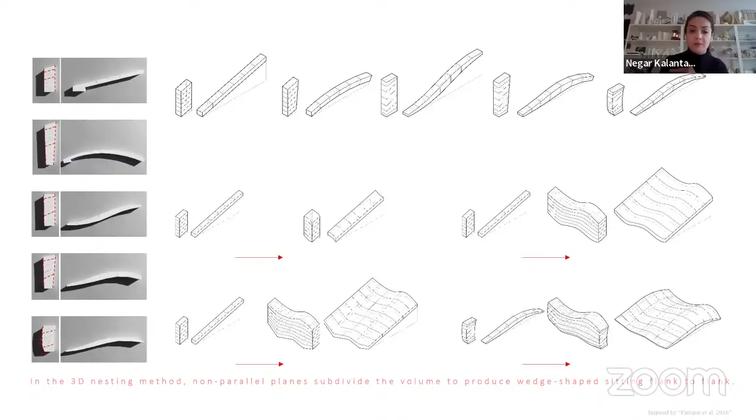But the main difference between 3D and 2D, 2.5D nesting is we're dealing with non-parallel planes for the division, so we can have angle or twist in the surface. But the idea is, for having large scale printing, how we can have components that are more compact and could be transported all together and assembled on the site.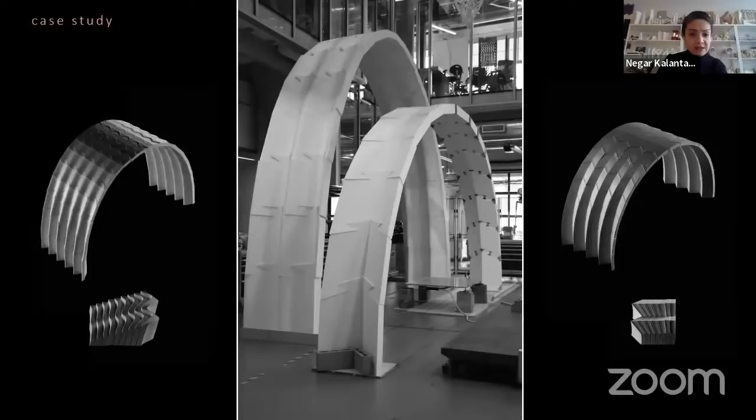In the process of fabrication for this geometry, we can deal with subtractive or additive. In the subtractive, we can wire cut. And the reason is we can cut the formwork and shotcrete on the surface of those geometries. And in the subtractive, again, we have a stack of materials and we can bring all the components out of that. This is a case study that we did to start designing the nesting design fabrication.

This was the first case study that we did in the Autodesk Technology Center in Boston, where we did a two-vault structure out of the stack of materials without any waste, and all the connections came out of the tools. And it could be assembled from the middle of the structure and rise without any crane or scaffolding. And we could ship it back to Texas A&M with two stacks of materials with FedEx. So it's more about how we can think about the whole process during the design process.

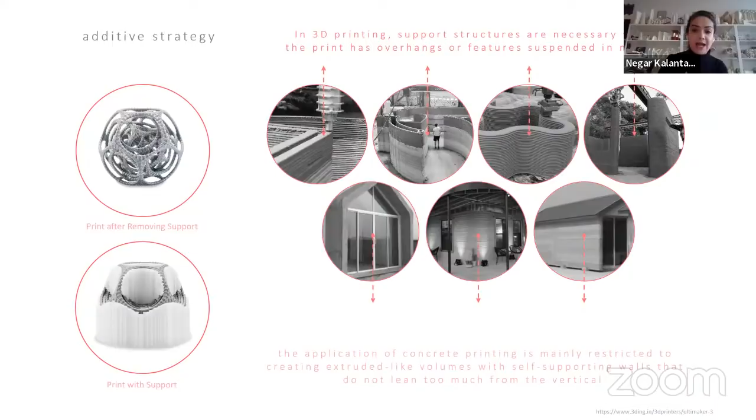But in the additive manufacturing, print-in-print or print-on-print, mainly we are dealing with the extrusion of the surfaces. And because the scaffolding is really hard to remove for materials like clay or concrete, we can only deal with just a straight surface. So we are talking about these two methods of print-in-print and print-on-print.

Mehdi? In demonstration of the print-in-print, we had a project at Texas A&M University. It was mostly a student project, and we were using the nested 3D printing strategy. So we used this small robot, IRB 120, which is I think the smallest ABB robot, and we were printing the geometry in different stacks. And there was a rule, as Negar explained.

So each geometry, you need to break it down into different parts with the same height that can be nested into each other. And the design rule for that is: a geometry consists of positive, negative, or zero curvature, and whenever the curvature of a surface is changing, we need to break it down and put it in a different stack. So we can take it out either by moving, rotating, or a combination of moving and rotating.

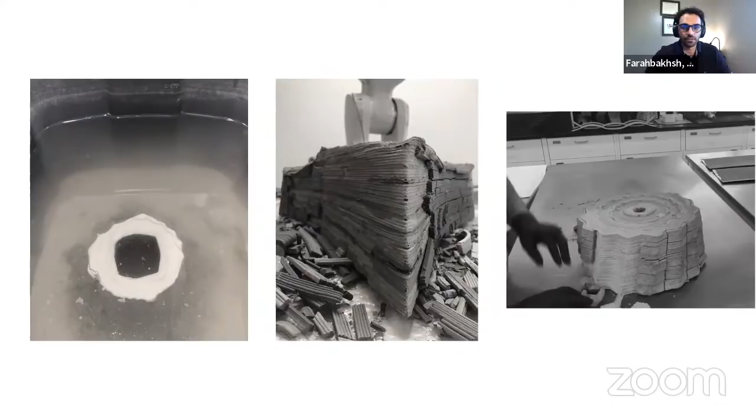This is where we used clay as formwork in this kind of prototype. We printed clay as formwork, and then we cast concrete between the layers. And when the clay was dried, it could easily be broken by hand, or you let it soak in water and it would dissolve, as you can see on the left. And the point was how we can print a structure which is larger than the scale of the robot. And it is a discrete approach to the design.

So for this demonstration, we had a dry installation system, so we could put all the components on top of each other. And the point is, when you stack them, as Negar explained, the transportation is very easy. For example, this one, 2.8 meters of the structure could be stacked in an SUV when you put them all together. And it was installed on the campus of Texas A&M University.

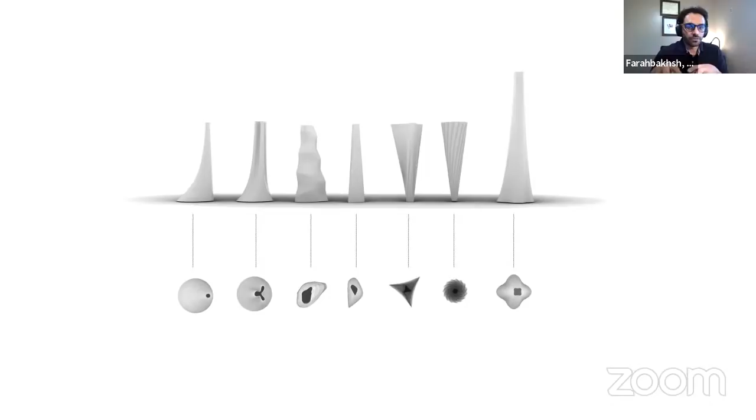And your imagination will be your limitation when you're dealing with this. So these are some examples of the geometries that can be produced with this approach. And as you can see, the orientation and the way that you stack them can be very varied. And in the print-on-print strategy, again, it can all be stacked on top of each other, and you can create a curvature form like this, for example, a porous form like this.

And this one, we were dealing with the design, material, and fabrication strategies to create that one. The only point is, with most 3D printers, the nozzle or the extruder is always facing down, or is perpendicular to the print surface. That way we cannot print inclined surfaces or non-vertical surfaces. On the left side, you see the result.

But when you change the orientation of the nozzle or the deposition of the material, the print will be smoother, and you can print more free-form structures without additional support. For example, in this one, we're printing just a tiny bit of support for the first one, and we were stacking all of them on top of each other, and there was a barrier. It can be a powder you can spray on it. It can be a plastic shield between those two components.

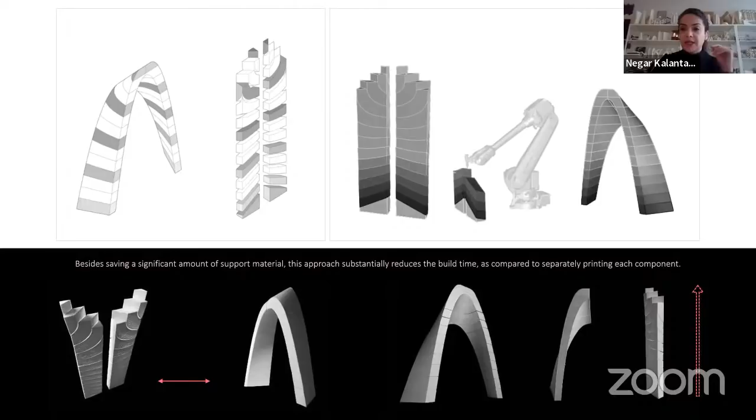And as you can see on the left side, they were all stacked on top of each other. And then when you remove them and assemble them in a different way, you can get the result on the right side, which is a more organic or free-form architecture. So for example, for making the arch on the left side, you can have the stack of the material on the right side. So we can print the geometry that needs the scaffold without the scaffold and assemble them after that.

So these are some examples generated with this idea of 3D nesting, and how all the geometry comes from components that could be stackable, and the scaffold could come from the 2.5D nesting as well. So it could be a production or fabrication without any waste. We're using the same technique of 3D nesting for designing for locations where we cannot have the advanced tools on site, how we can take the stack of materials, for example, for pedestrian bridges, to the site and assemble it there.

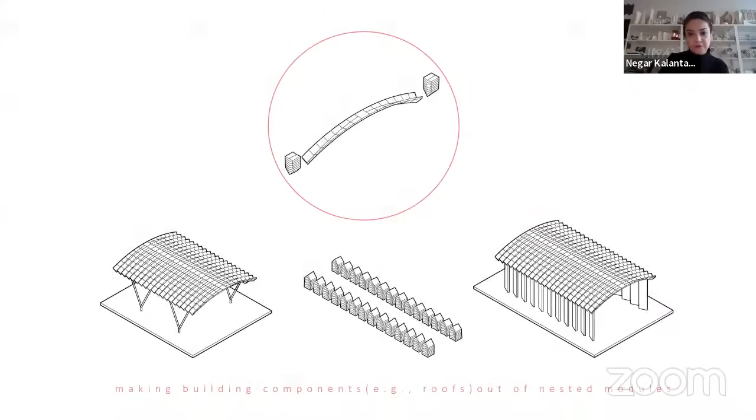This is a design proposal for, again, remote areas where robotic or advanced construction cannot happen on the site. And you can assemble all the components inside. So the technique could be used for different parts of the building, from the beam structure to cladding. But the idea is how, with new technologies like clay printing or robotic 3D printing, we can have less waste of material, less machining time, less transportation and storage, and less waste overall.

In conclusion, we think as researchers, how can we make the gaps smaller? There are a lot of people working in parallel on the topic of robotic printing, but a lot of things are overlapping, and we are not sharing the basic process and the challenges that we are dealing with. So Mehdi and I have been working on a platform where all the researchers on this topic of additive manufacturing with clay could contribute their research or resources, so we can be more connected together.

I'll share the link on YouTube, so if you are working on this topic, you can add your name or your research on this platform, and our hope is we can work more closely together. And I think what Digital Future is doing every week is amazing, making this gap much smaller and connecting researchers who are not in one country or one language.